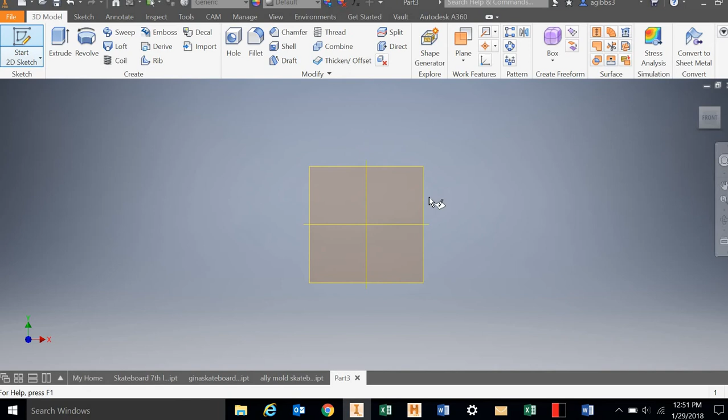So after you pick your teacher nameplate, you're going to open up a new part, and you're going to start a new sketch. People get really finicky about which plane you start on.

I don't, because you're creating it in 3D space, and you could always reset your origin if you did it wrong and you need to have it in a different place.

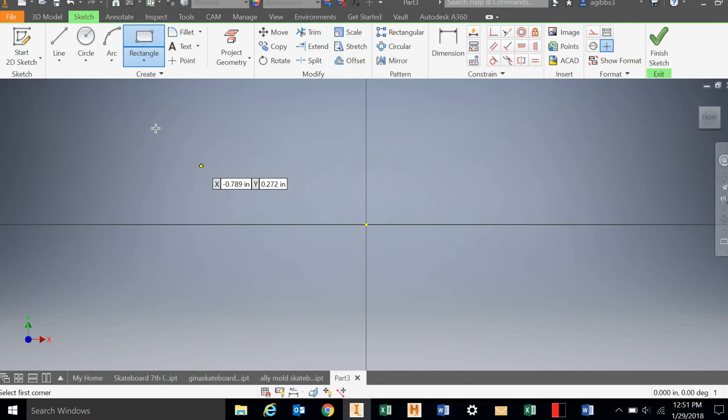A lot of people say start at the middle of the origin. I don't, because having those lines connect to each other can get confusing. So I actually say don't attach it to anything, don't try to line it up with anything. You don't have to worry about other constraints interfering.

Now you have a rectangle. You started a rectangle in your sketch, and this rectangle is eventually going to be a 2x4, and it's going to be a 2x4 that is 11 inches long. So you'll cut a 2x4, your stock material, to be 11 inches long.

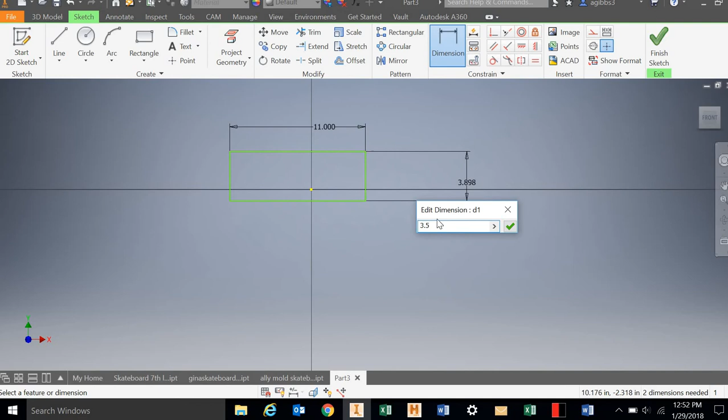All right, and then we'll have it be... and then we're going to make that 2x4 3.5 inches tall. So a 2x4 is not actually 2 inches by 4 inches, that's the rough cut on it. When you go buy a 2x4 from the store, it's usually right around 3.5 inches.

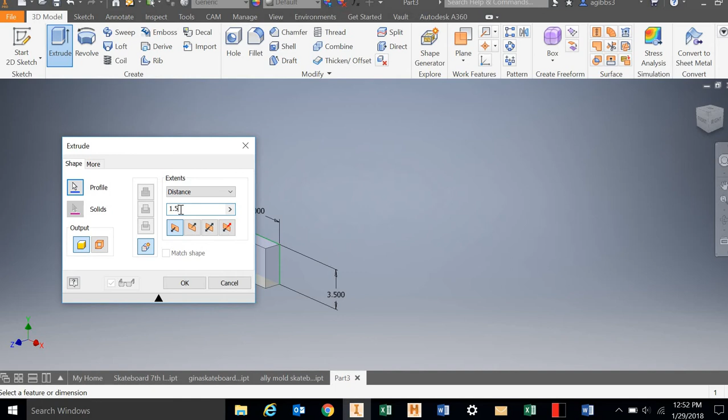It's not exact, they don't mill it to precision, so it can vary quite a bit, but we'll use 3.5 for our measurement here. Then we're going to finish that sketch, and we're going to extrude it, and that's going to be 1.5 inches. So the 2x4 is actually not 2 by 4, it's 3.5 by 1.5, so they take a half inch. There's the beginning of our nameplate.

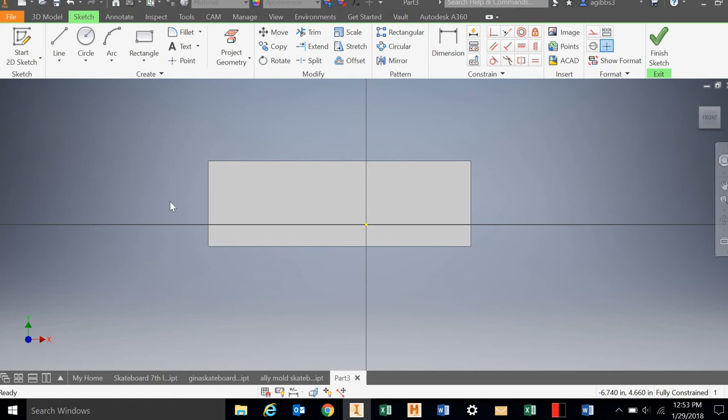So that's really the biggest part that you'll need. The milling machine, when you actually put in your letters here, the milling machine that we're using is limited to about, on the X and Y axis, a 10 inch by 6 inch square.

So we're just going to match it up with a 10 inch by 6 inch rectangle. We're going to match it up here and constrain it to that line. Okay, and you see how I left some space at the edges?

Well, that's because the milling area, or the working area in our milling machine, is only about 10 inches. So we're going to go 10 inches, and there should be some space on the side. You notice that it's not even.

Well, that's because we need to dimension the whole thing. A lot of times people say, well, you know the measurements, you know it's 11. Well, yeah, you do know it's 11, but what happens if you change that 11? And what happens if the piece that you cut, you want a cut that's 12 inches long?

Then you'd have to go back and change a second set of dimensions. So what I do is I actually take the constraint-driven dimension up here, and I use that in an equation. I'll click on the edges here, and then I can write an equation, and we'll do our overall block of wood, which can change. If, let's say, we made it a longer extrusion for our original block of wood, our stock, we're going to subtract out what our box is here.

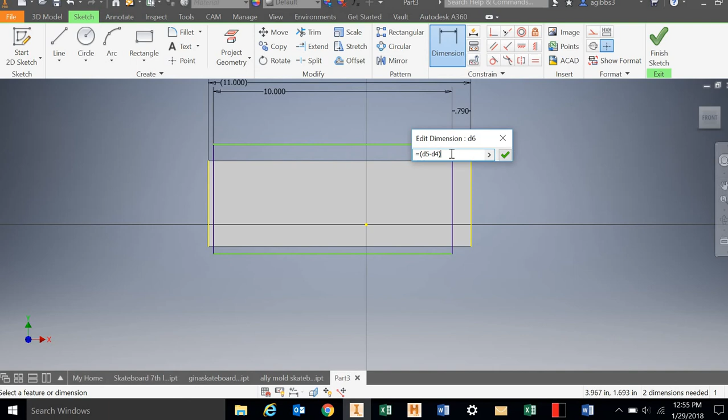All right, so now we have that centered in there. Let's dimension it to the top of our line here. There's other constraints you can use, but we're used to using the dimensioning tool, so we can just make that dimension between those two lines zero. All right, so there we go.

So now I have a box, and really this box is a guide for what you need to have your text inside of. So as long as your text stays inside of this, you're good. So you're going to use text, start a new text box here, and something will pop up.

And my name is Mr. Gibbs, so I'm going to make mine real quick. I'm going to say Mr. Gibbs. All right, so it is best to stick with text that has really clean lines, because if you try to extrude something with a really fancy font, it won't extrude it, and you'll have to do some funky things.

And we still might have to do some stuff to this one, even using the embossing tool. So some people use the embossing tool. Sometimes that's a little finicky. You can also use the extrusion tool. So I know that's not the by-the-book procedure on how to do it, but it gets the job done, and sometimes getting the job done is pretty important.

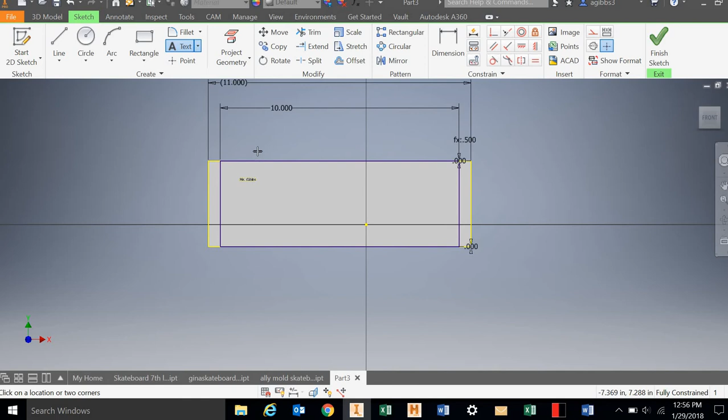Okay, so we have 0.12 inches tall here. Well, that's not going to be tall enough for us. You see how small it is compared to the rest of the sign. It's not really what we're looking for here.

So we're going to double click on our words. My computer's trying to catch up here. Come on.

And then we can highlight that. And we know that the block of wood is 3.5 inches tall. So to give it some space on the top and bottom, that gives us a little margin for error. Let's say we'll call it 2 inches, and we'll make it 2 inches tall.

Let's see what that does. Okay, so we can see that my name actually popped down. So I am going to delete that. Oh, I need to make my text box bigger.

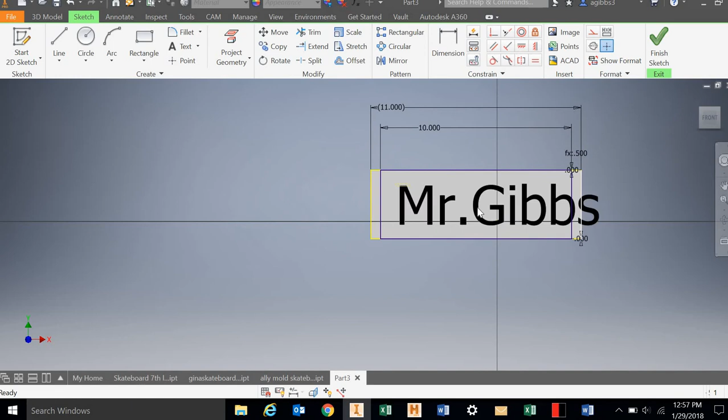Okay, so you notice how my name does not fit inside those two blue lines. So we're going to have to change that. We're going to have to make it a little bit smaller. So maybe we can try 1.75. And there, my name fits inside the blue box.

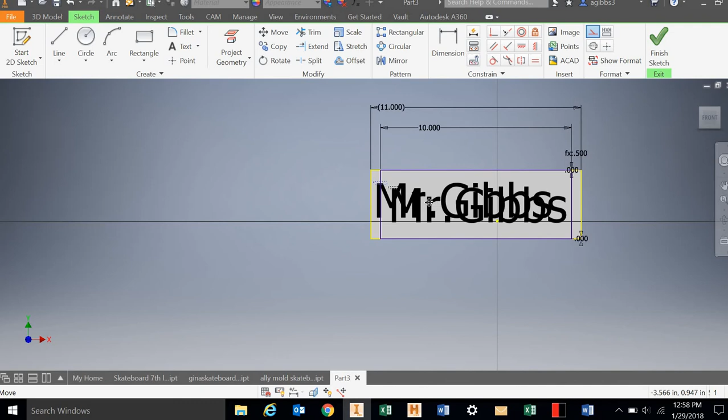Yep, all right, so we're in there now. Okay, so I'm going to finish sketch. I've got my text in there, and you can either extrude or emboss the text. If you do run into an issue with this, so we're embossing it and we actually want to do a cut on it, so a name cut in there.

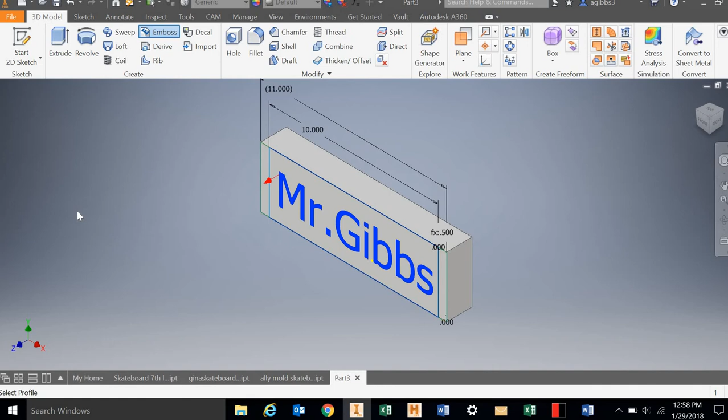All right, so now we have something that we can actually mill. So next up is going to be setting up our CAM. So we have our CAM, we need to do a setup on it.

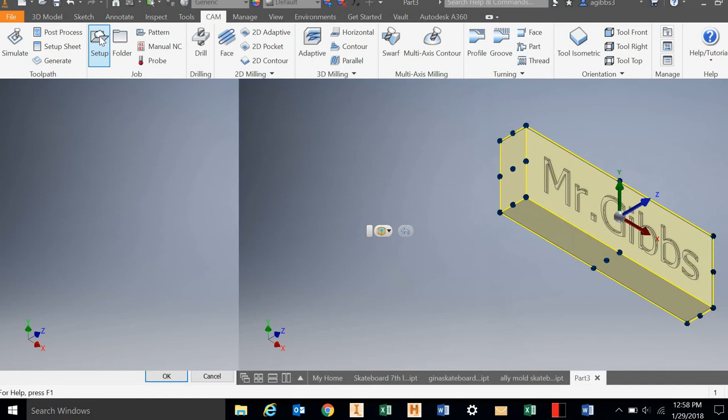Okay, so this is not the only way to do this as far as your setup of your CAM, but you do need to pick the lower left-hand corner for your milling operation. And so this one worked out nicely. I used the right plane, so my X, Y, and Z all line up perfectly.

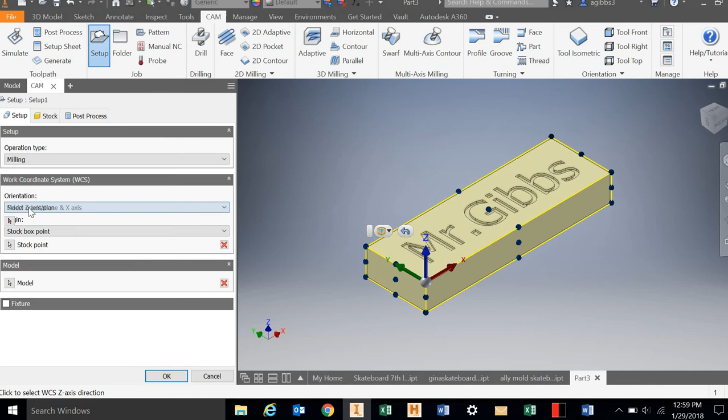But let's say it didn't. Let's say I changed it. Let's flip my Z axis. Okay, so let's say my Y axis and Z axis weren't going off in the right direction, right? We want them pointing: the X axis down my name, the Y axis going to the side of my name, and the Z axis pointing up.

Well, you can always select like the Z axis, okay, and it's already selected, so it's kind of obvious, but you select a line going up and down for Z, and then if it's pointing the wrong way, you can say flip the Z axis, okay. You can always select any X, Y, or Z and change what axis that belongs to.

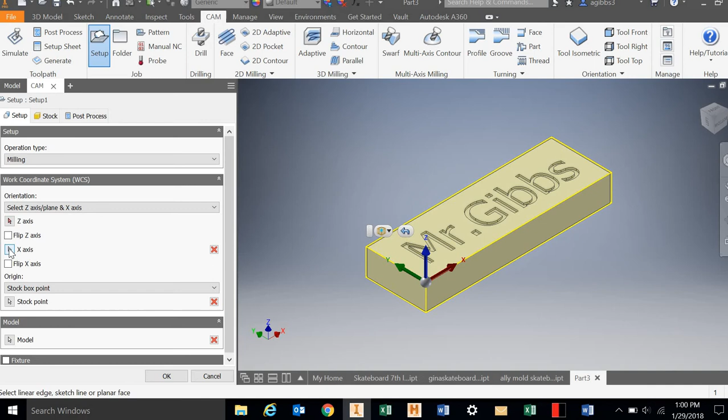It didn't like me that day. Well, you can always change it. So we selected Z, I think that's why it's not letting me change axes. But you can always change that. You can, well, almost always for some reason. I said always, but this one's not working for me.

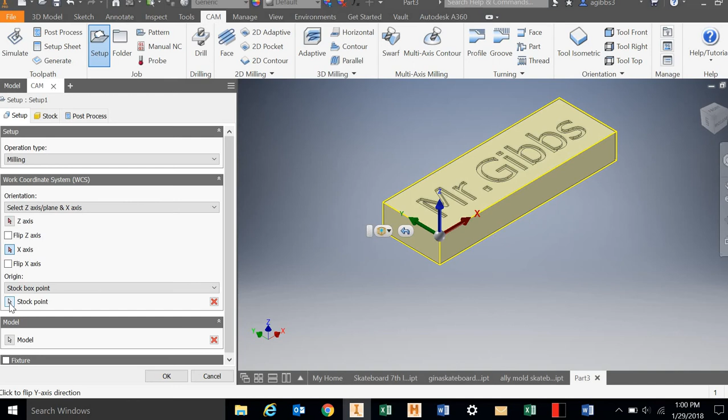But you definitely want to select the lower left-hand point and play around with your settings in here to get the correct Z axis. So again, you want the lower left-hand of the name, whether it's a Mr., Miss, whether you call your teacher a nickname or whatever it is, that's going to be their name tag right here.

All right, so set up your stock. We're going to keep this really simple. You're not going to have any stock offset.

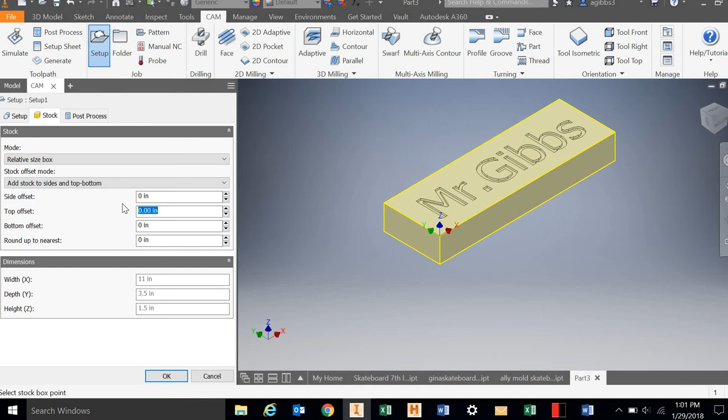Okay, so we're going to change both the top and the side to 0, and we'll hit OK.

Now you're actually ready to start setting up your milling paths. You're going to set up the one I like to use for this project, and it does leave stuff in the middle of it, which is fine by me if that's how you want to do it. If you don't want stuff left in the middle, that's what we call a pocket. I'm going to use a 2D contour, and a contour just follows a line.

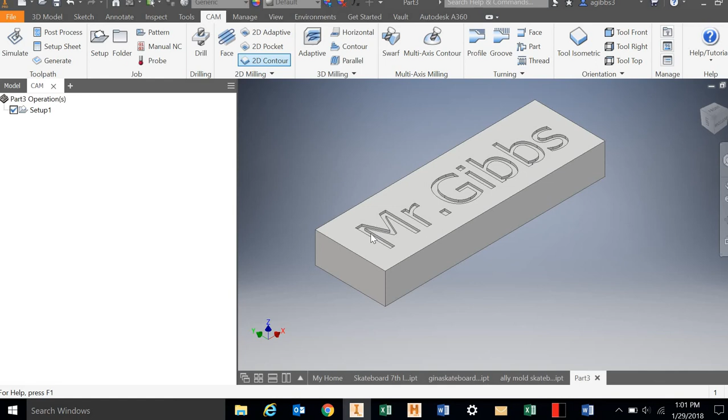So I'm going to hit 2D contour, and I'm going to set up my milling path right there. I click on that edge, and that blue line is the path that the bit is actually going to follow. Okay.

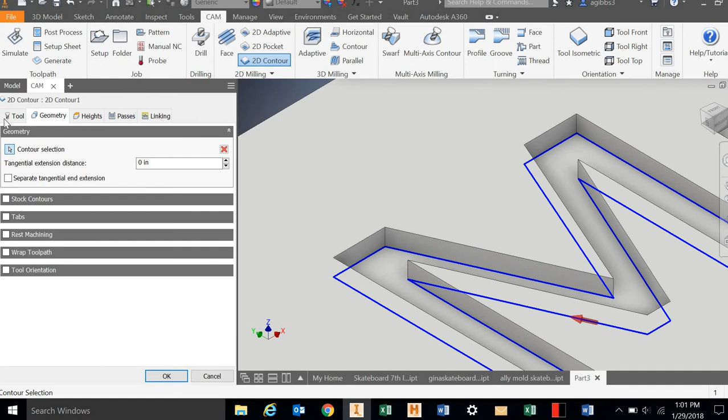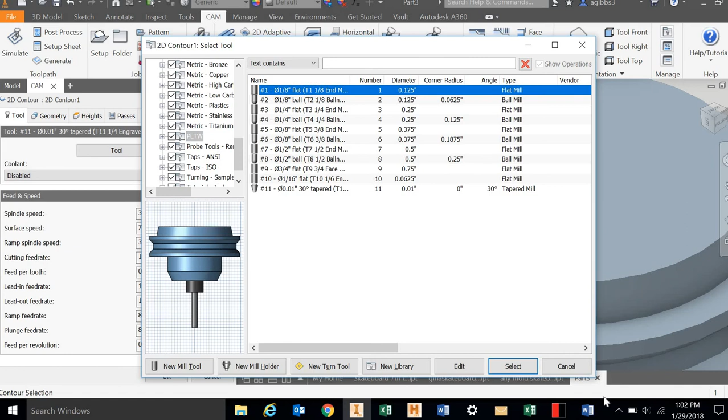We're going to change our tool. I'm going to select our tool here, and you go down to PLTW libraries, and we're going to do an engraving tool. Actually, no, I told you guys I was going to select a 3/8 inch end mill. So let's do that, sorry. End mill means that it's flat, so, or 1/8 inch end mill. So there it is, right there. You could choose the engraver, completely okay with me.

And then you want to check your feed rates here. So cutting feed rate is 18. That's all fine, that'll work for our tool. And then last but not least, stock contours, I'm not worried about that. The big one that I want you to worry about is our step over and our step down.

So you're going to come over to multiple depths. And instead of a maximum roughing step down of 0.04, we're going to change that to half the width of the bit. So we have a 1/8 end mill. So you grab your calculator if you didn't know what half of 1/8 is. And you're going to do 1 divided by 8, and that's going to give you 0.125.

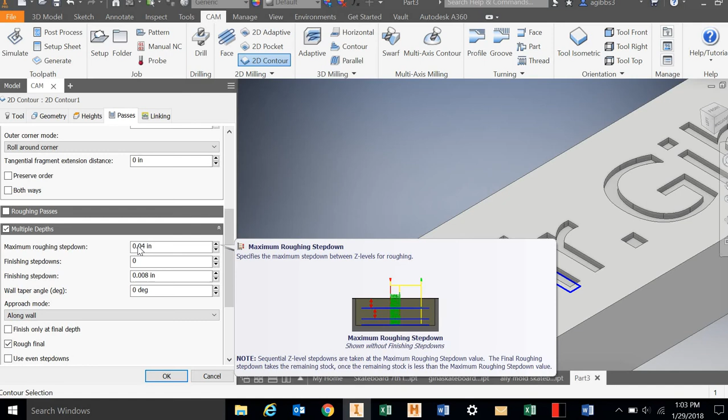And then you're going to divide that by 2, and you should get 0.0625. And that's a really conservative number. You're not going to break the bit on wood with this one, and it'll be a little bit faster than what they had set it at originally.

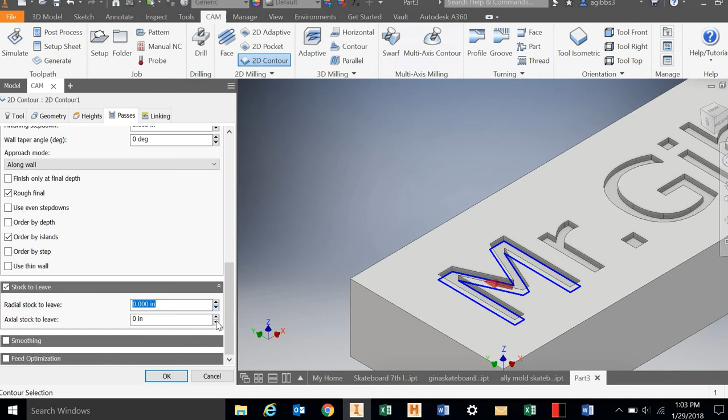Okay, so stock to leave, you're going to select, you want no stock to leave. You're going to set it at 0, and you'll hit OK. So my letter M is done.

So what I can do is go back and click on my setup and hit simulate, and we should see my letter M get milled. You can see how it's going around the outside, and there we go. It's going to take a couple passes there.

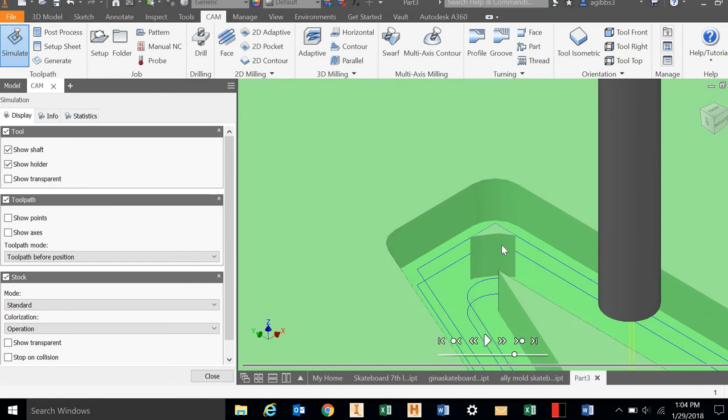Okay, so you can see in here it actually left 2 little spots right there. If you didn't want those spots, you can use the pocket tool. So let's say we wanted to delete that.

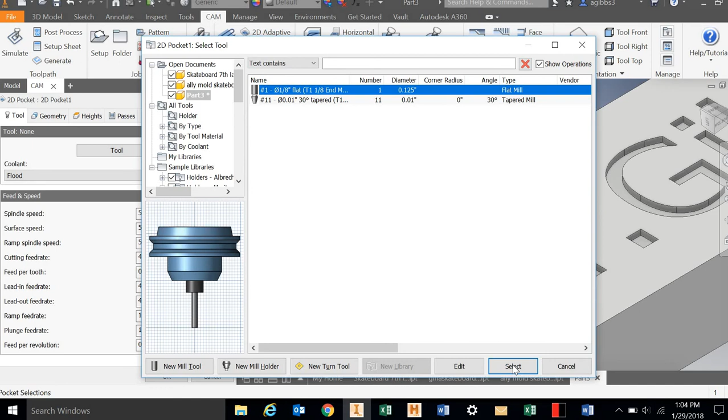Okay, and we're going to use a 2D pocket. So we're going to click on, oh, wait for it. Okay, so we're going to click on our 2D pocket right there. And then we're going to make sure we have the right tool selected. The 1/8 end mill is probably a good one for that. Yep, keep that selected. And then this one, once you select the tool, it'll pop in the settings for you automatically.

And again, I'm worried about the step over and the step down. So we're going to change the radial stock to leave as 0. And then let's see, multiple depths, we're still using the 1/8 inch end mill, so we're going to stick with 0.0625.

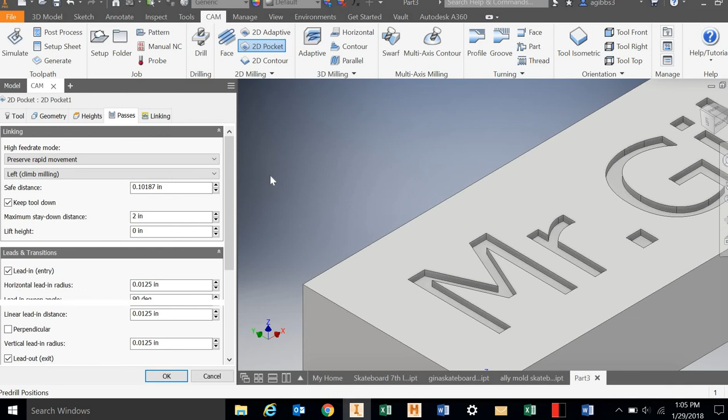And then it should have a maximum step over. Finishing patterns, allow to, okay, so looks like it's pre-selecting that one. Okay, maximum step over right there. Okay, so that's actually a pretty big maximum step over, that's almost 100% of the bit. So we wanted to change that to half the width of the bit again, that way we're not getting any, we're not going to break any of our bits. So we're going to say 0.0625, and we'll see if it'll let us do that.

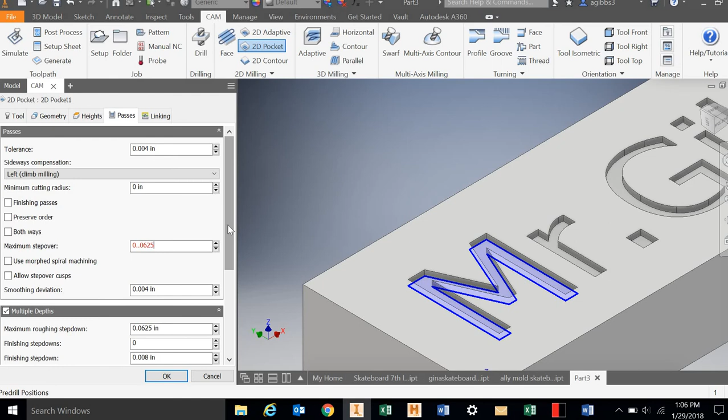Okay, so you can see it drilling down in there, and we have our tool path, and then we'll hit simulate. And if you don't like the speed of your simulation, you can always speed it up.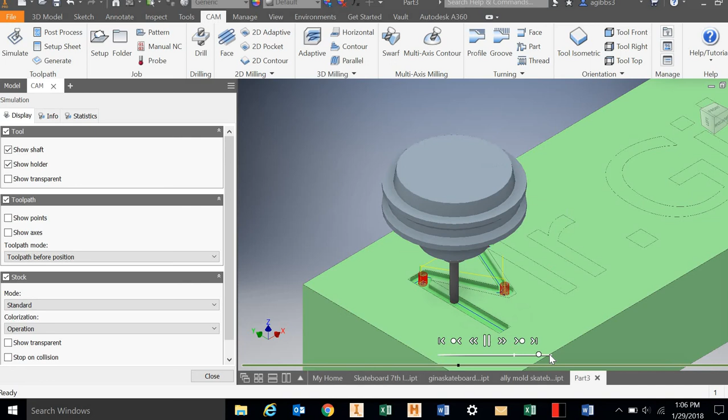Using that little dot, and watch it go on through. I know, this is riveting. This is maximum Hollywood entertainment right here.

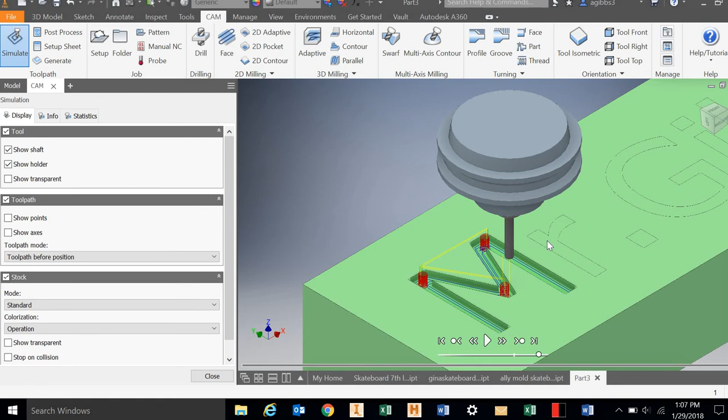Okay, fantastic. So my M is milled, and then you would follow that for all the other letters that you're going to do on here. Once you have all those letters milled out, you would hit post process, and then change it to Intelitek.

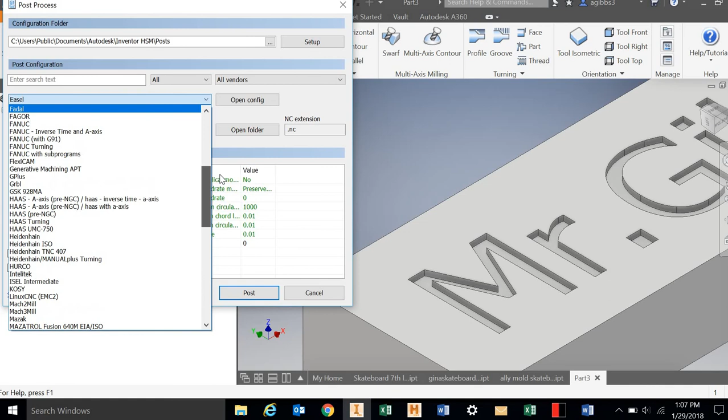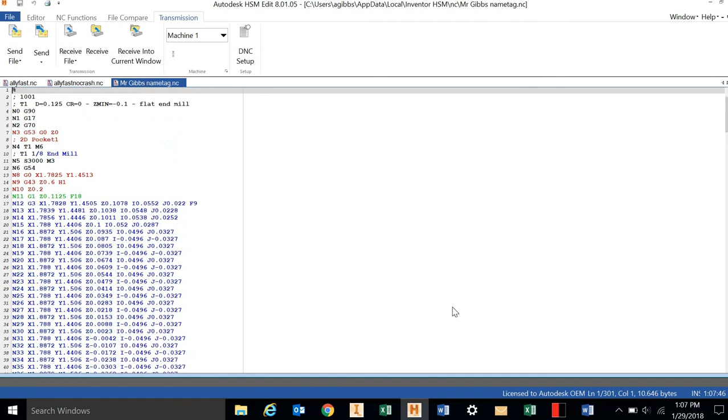Come on down here, change it to Intelitek, there it is right there, and you would hit post, and then you'd have your Mr. Gibbs name tag. Awesome, okay, so we've got it saved. There's all my code for just that letter. Of course, you're going to do it for all of the letters, and then you can test that out in your CNC motion.

Okay, let's go back to this real quick because you do have another step. You are going to do some laser cutting on the back side of this guy. So here's your final step, and this should be the same, 99% of it should be the same for everybody, except for your name on the back. So you're going to do your name on the back.

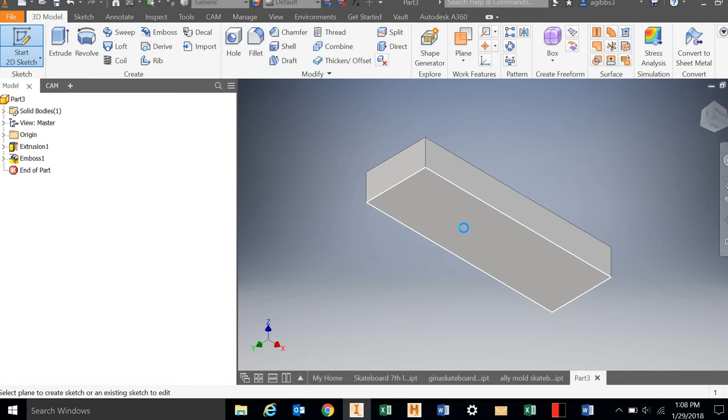Okay, and you're going to do another text. This one can be smaller, it doesn't have to be as big, but the thing you're going to write in there is your name. And please don't write the words your name, write your actual name. If your name is John Smith, you need to write John Smith.

The tools that you will use to make this, you are going to list them. Tool number 1 is Autodesk Inventor. Tool number 2 is HSM Ultimate. All right, I'm going to hope that I don't spell any of these things wrong. You guys all know how good of a speller I am. All right, so HSM Ultimate.

Then you are going to use CNC Motion with the Benchmill 6000, that is the milling machine we're going to use. And then you are also going to use the Boss Laser 2436, and that is the laser engraver that you're going to use.

And you're actually going to laser engrave the back side of this so that when you hand this to your teacher, they will know that you know what tools you actually used to create this.

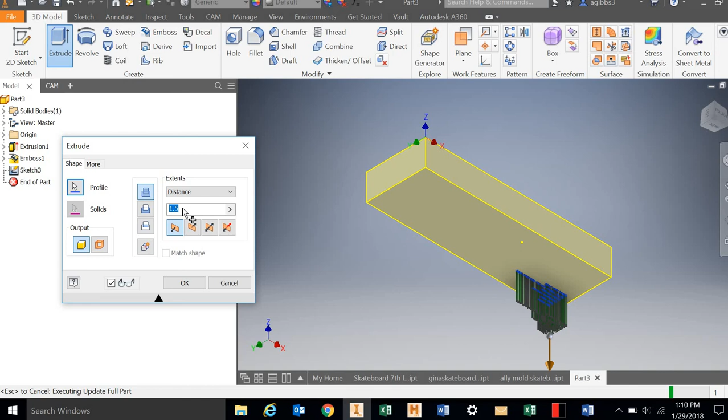And we are going to extrude this, and then we're going to export the face. Okay, so let's extrude that. And we're going to extrude it in, and we're actually going to change it to 0.05, so 5/100ths of an inch. Is it going to do it? Is it going to give me an error?

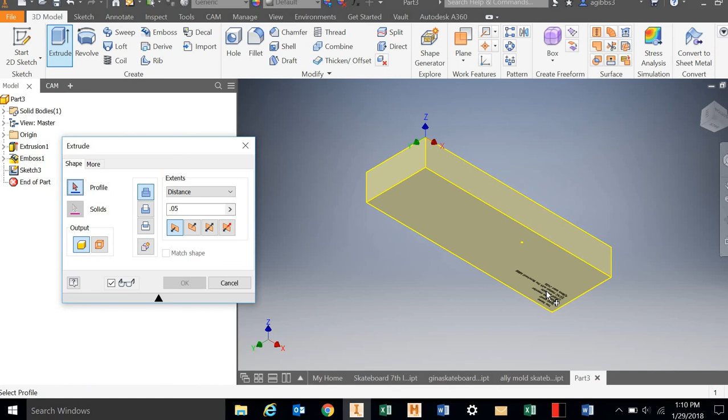Okay, so sometimes when you try extruding stuff, it doesn't like extruding in. So I've found you can also, if you can't extrude it in, you can extrude it out. Let's see if it'll do it there. And it did it, okay, fantastic. Awesome, so there's all my extrusions coming out.

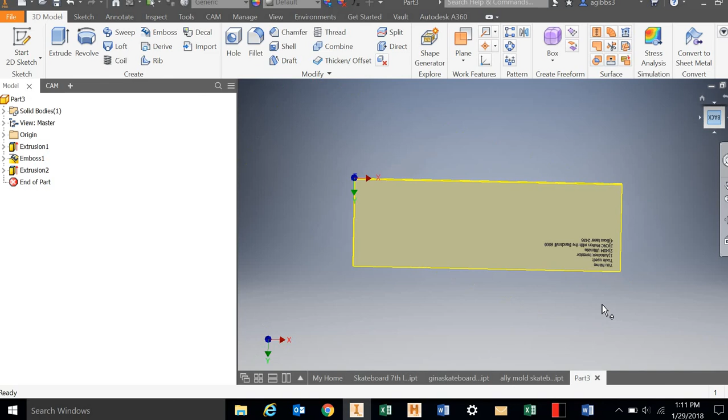And because we're just laser cutting that in there, we're going to right click on that face, and there should be a way to export face, and you want it to be a DXF file. So we're going to save that in our nameplate folder. You can make a folder for nameplate. I'm going to go boom, and we're going to export that as a DXF file.

So back side, Mr. Gibbs. Awesome, okay, so once you have that exported, it's pretty easy to import that into our laser cutting software, which I'm going to come back and show you how to do a little bit later on. But you do need to export that DXF file for the laser cutter, and that's really easy to set up in the laser cutting software once we have that.

So remember, both sides, you're going to pick a teacher name. I'm going to have you do that in Google Classroom. You'll put it in the comments, and I'll show you how to do that in class once you have turned in your CNC or your HSM Ultimate assignments.